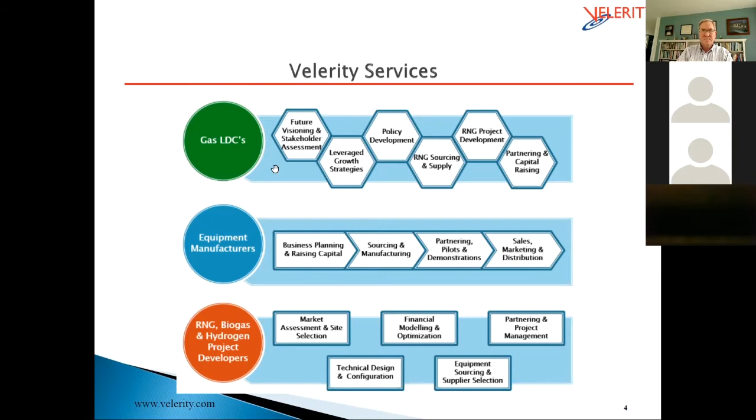So we've all heard of the colors of hydrogen. And there are some people - I've heard that nuclear power now has 2 different colors. One was gold that I heard recently, and the other was pink. I don't know which way the nuclear industry is going with their color choice, but let's put that aside for the moment and look at what all the hydrogen pathways are.

This is a fundamental element of moving to a hydrogen economy as was envisioned in the 1960s - hydrogen represents, I think, 76% of all the material in the universe.

It's a ubiquitous element, and there are many ways to get access to hydrogen. There is a company in Canada that claims to want to mine hydrogen from the earth, but for the most part, hydrogen does not occur naturally—you have to separate it from something else.

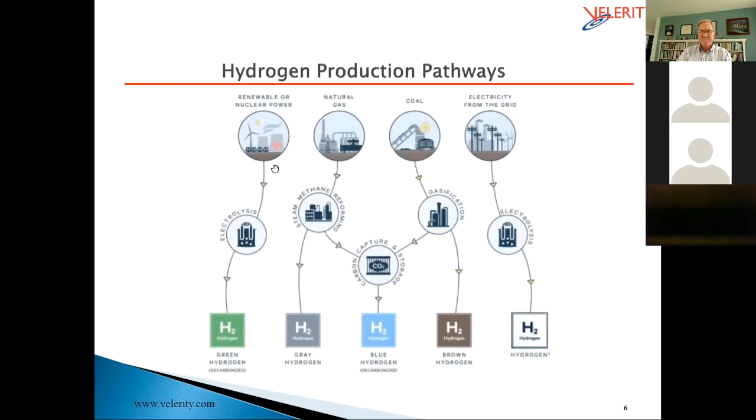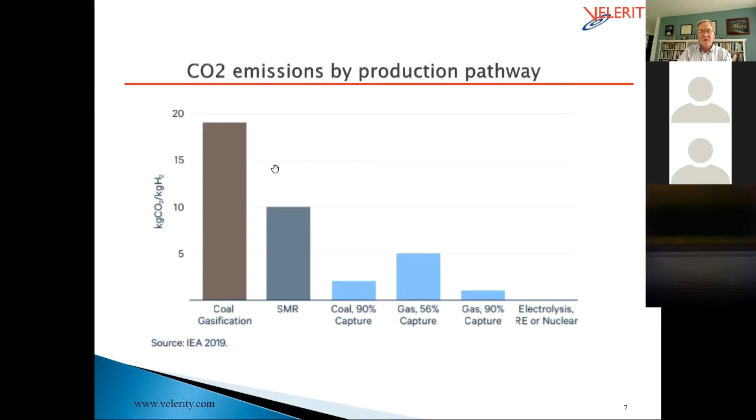In California, for example, when you run one of the 10,000 hydrogen cars that are currently operating, the hydrogen actually comes from natural gas. Potentially you could use electrolysis, but it actually is SMR hydrogen, at about 10 kilograms of CO2 per kilogram of hydrogen, and they buy offsets from the biofuel industry to green up the hydrogen. That's the strategy in California.

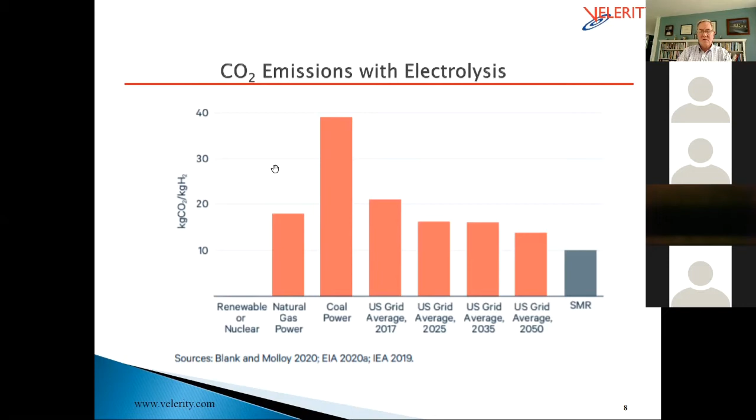Here in the Northeast, I understand the strategy is to buy liquid hydrogen for transportation, sourced from Hydro-Quebec generated hydrogen through electrolysis and hydropower, which is fairly clean. I also understand that might be a mix, not 100% green hydrogen, depending on the source of electricity, but it all bears closer scrutiny so that any claims made are accurate in their representation.

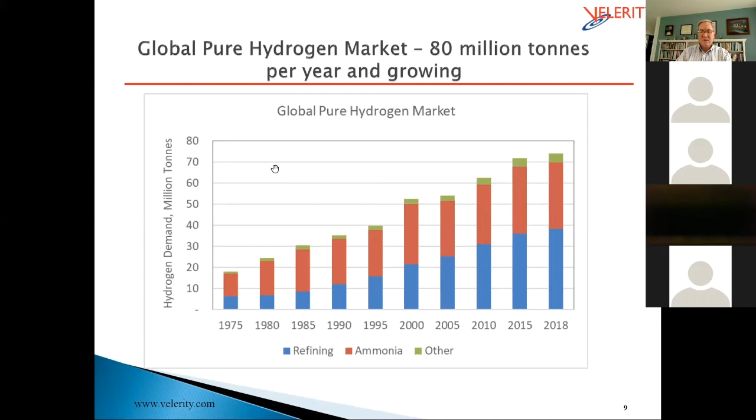It has doubled in the last 30 years, it appears - quite a bit of growth. So the question is, will this industrial use of hydrogen continue? If we reach peak oil, I assume we'll see refining intensity of hydrogen use level out, if not decline. And the greening up of ammonia is being very aggressively pursued around the world. So we'll begin to see the use of gray hydrogen presumably go down, not just because we're cleaning it up, but also because the root demand might be shifting.

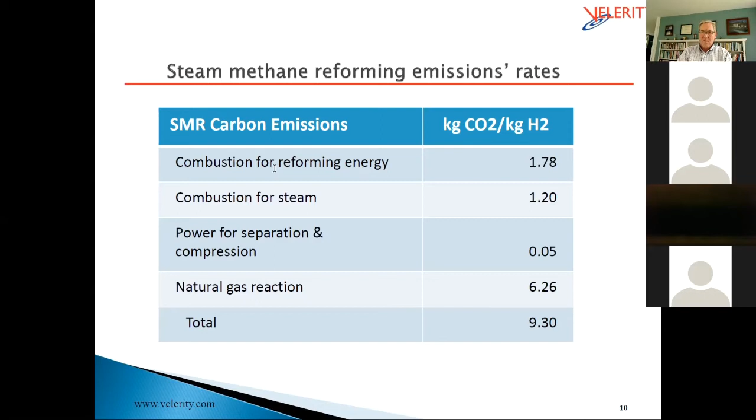If we're to achieve the carbon objectives, it's like climbing up a mountain one day, and then the next day you have to climb down the mountain. That indeed is what some would hope this chart would look like - that it would hit a peak and begin to go the other way.

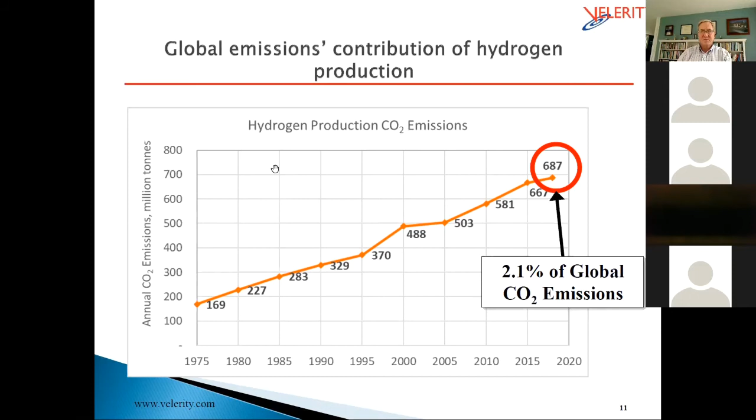The current carbon pricing is around $50 a ton, so there's quite a distance to go between $1,100 and $50. Direct air capture may be good in theory, and maybe we have to begin developing technologies that get us to 20 years from now, but it really is not a near-term approach. In fact, one of the early industry leaders in understanding carbon capture technologies was asked, this is kind of hilarious, if they would invest in a direct air capture company, of which there are several, and clearly demurred on that opportunity.

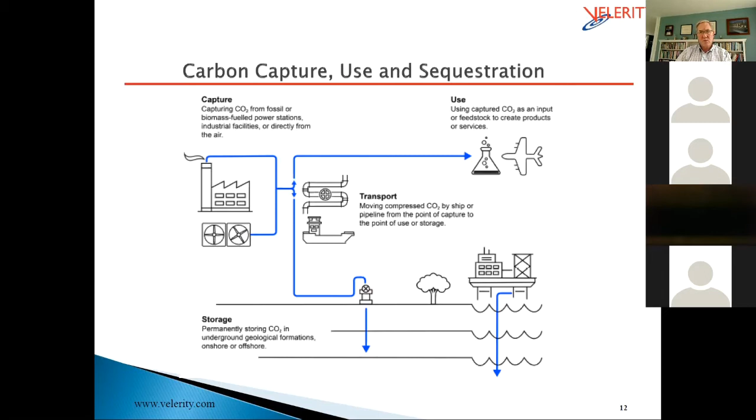Now, what is the process for this thing we call capture? The way it's done is you take CO2 and find a scavenger material that will absorb the CO2, then you change the conditions, temperature and pressure, to regenerate the absorbent material and eject the CO2. So it's absorbed from a mixed gas and then regenerated in a non-mixed gas situation, a higher concentration of CO2.

We really don't need to go over all the details of this particular chart, but it's fairly straightforward. The main column on the left is called the absorber, and the main column on the right is called the regenerator. Amines are used in a circular fashion to absorb the CO2. Off the absorber, there's a sweet gas escape, and on the regenerator is where the CO2 rich gas is ejected.

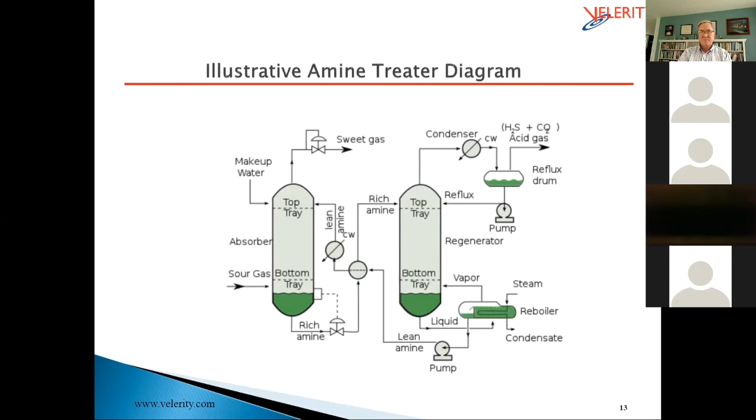The amines are, there's a range of them, so it's not just one that's used. The major ones, as I understand it, are the MEAs and the MDEAs used in these processes. You can see that there are different levels used depending on what you're trying to achieve.

One thing we haven't addressed yet, which we touched on earlier with atmospheric direct air capture of carbon, is that there are different concentrations of carbon in different processes. SMR has one of the highest concentrations of carbon in its flue gases, which makes it a lot easier to separate the carbon. Coal, for example, I think is the worst - they only have about 15% CO2 in the flue gas.

So various processes have different levels of carbon, and you apply different carbon capture methodologies depending on what that slipstream is that you're trying to address. It's not a one-size-standard-fits-all kind of solution. There really is a diversity of gas mixes out there that need to be addressed.

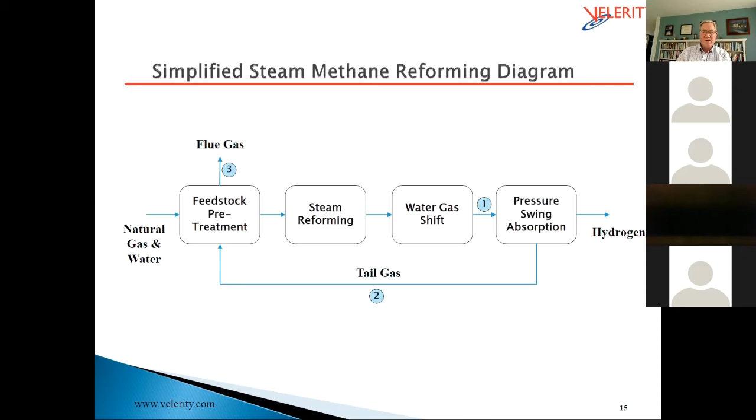The biggest one is 3 - that's the dominant one. You put your amine absorption system on the flue gas, and that's where you get your dominant reduction. But you can also do it in these other steps, which are contributory to reducing carbon dioxide, but don't do the lion's share. So, to be clear, there are different approaches that can be taken, each with different levels of carbon mitigation, as well as different economic considerations.

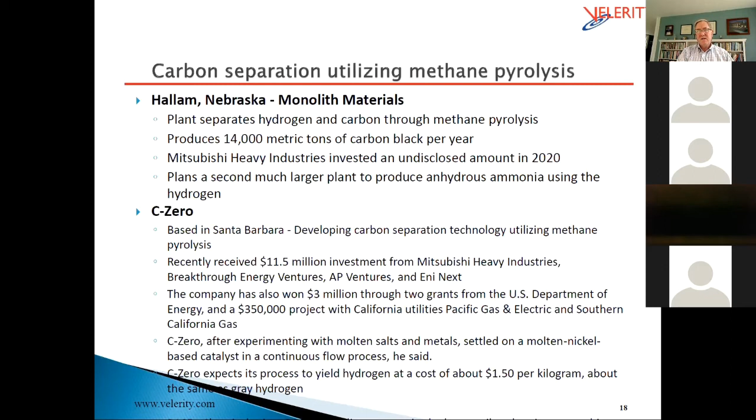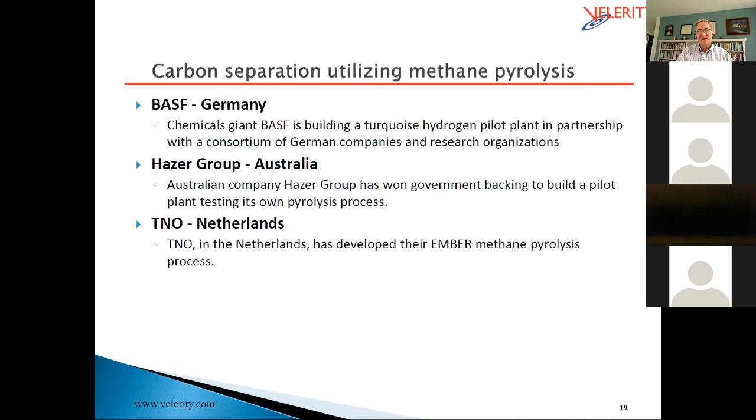These are some of the big companies around the world that are pursuing this technology. And I think we'll see a lot more of this type of solution develop going forward.

This is just to show Monolith Materials has actually built a facility and they've been operating it for 5 years. It's designed to produce carbon black. They didn't design it to make hydrogen, and they're building a complementary plant next door to produce ammonia now that they have all this hydrogen. So they're not trying to feed the hydrogen into any kind of energy production or hydrogen market. They're now figuring out they're going to put in an ammonia plant to use the excess hydrogen from the process that was designed to produce carbon black.

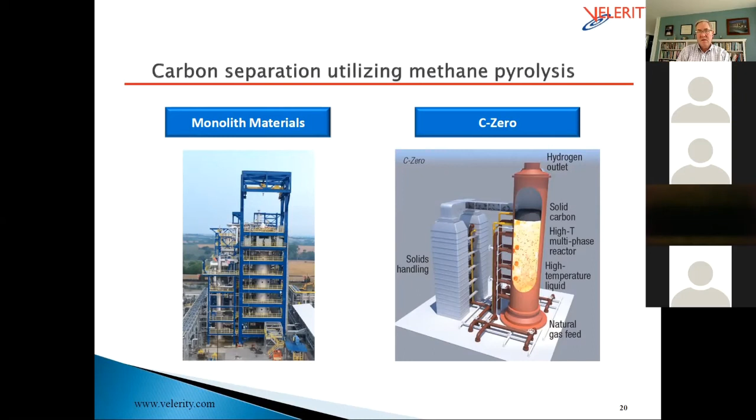And then C-Zero, same thing, fairly sizable process to precipitate out the solid carbon with the pyrolytic process involved as well.

So the remainder of this presentation, I'm just going to zoom through because I can see we should be opening to questions soon. These presentation materials are going to be available for you after the presentation—we'll post them on the Hydrogen Energy Center site for you. So I am going to take the opportunity to rush through a few of these, but just to show that the industry has really moved ahead in terms of addressing some of these issues.

This was a facility that was built for enhanced oil recovery. It's in Texas, and it was put in operation, as you can see, in 2013. The CO2 was then used for enhanced oil recovery. So that was the purpose in doing the carbon separation here, not to reduce carbon emissions.

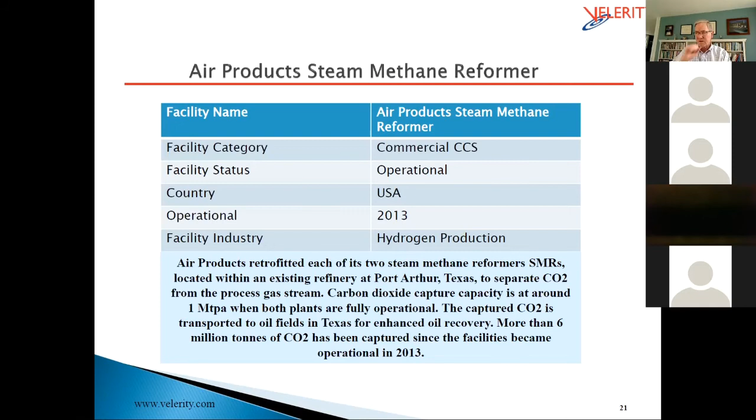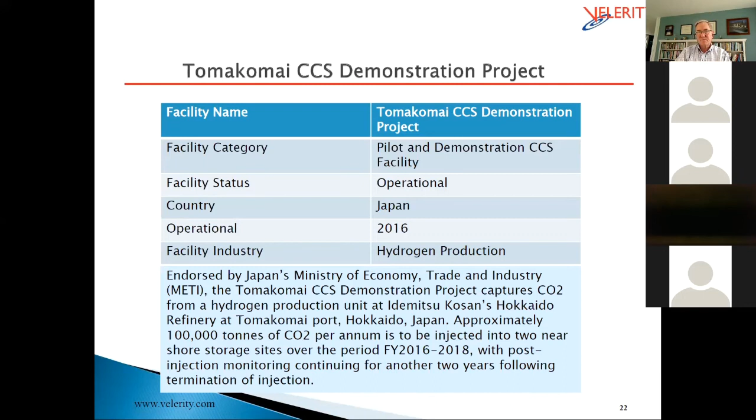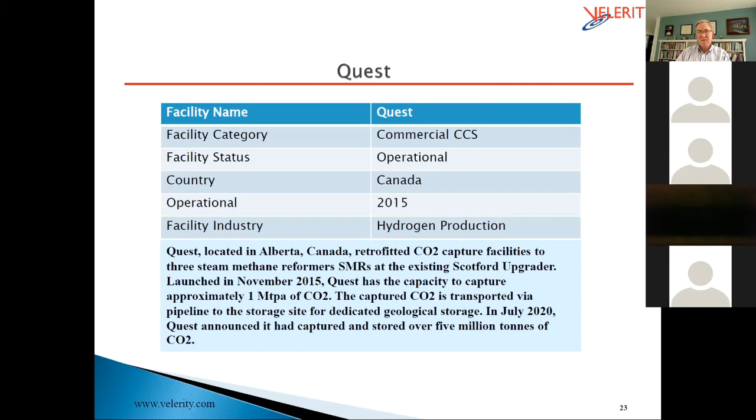I've spoken about this project earlier because this is a large SMR as part of the petroleum industry in Canada that takes tar sands and produces oil products. In the production of oil products, as we've mentioned, you need to take sulfur out and do other things, and hydrogen is used for that. So they have several, I think 3 very large steam methane reformers. They've also just started stripping off some of that hydrogen to be used for injecting into a natural gas pipeline. But the key here is that they're taking that CO2 and pumping it into a depleted well, and they are making every effort to decarbonize as much as possible to enable the continuation of their petroleum business. It's kind of interesting—I think they've invested over $1 billion in this facility.

This is certainly another project in the United Kingdom, and again, it has to do with sort of the classic case of injection. I want to get to some of the other projects here, and then we can open up for questions.

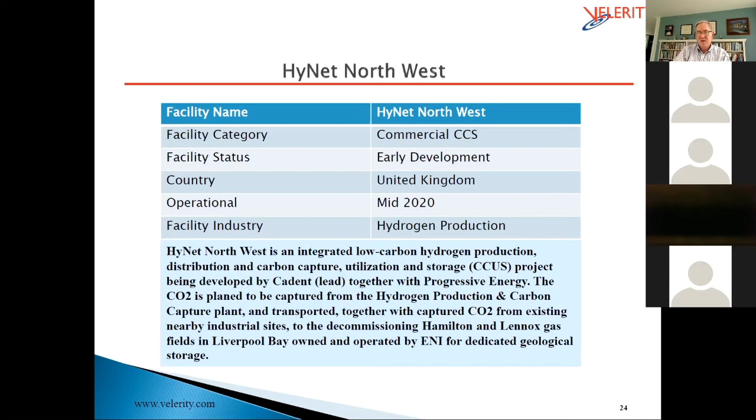This is a supply chain from Australia. Australia, similar to Canada, has a very strong interest in maintaining—they are one of the largest exporters of coal in the world, and they also export natural gas, and they want to keep that business going. So there's a strong effort to decarbonize it as much as possible. But they're looking at using coal to produce hydrogen and then to ship that hydrogen to Japan, and to complement that project with carbon capture and sequestration as well.

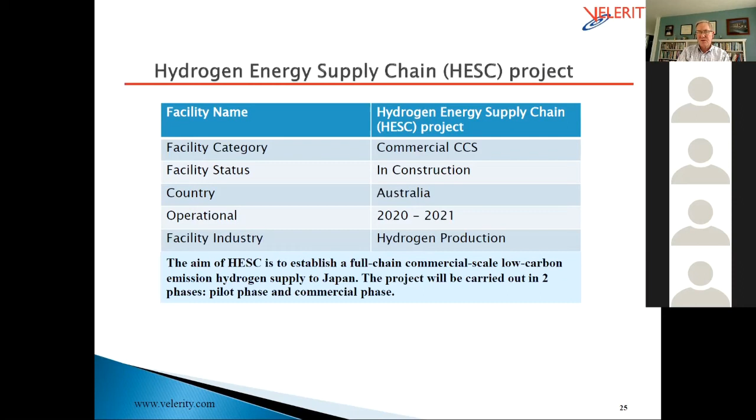Now, I did just want to mention this one, and we're going to see a lot more of this going forward, and then I think we'll open for questions. The concept of carbon negative is a process where you use biomass to produce energy, but then you capture the carbon that's emitted from the biomass combustion, and you sequester that carbon. This is one of those potential systems because it's seen that if you're using a regenerative biomass resource like trees, those trees will be regenerated and capture carbon going forward. People are concerned about biomass because you may be emitting a lot of carbon today, but then capturing it over decades. So there's a mismatch of the timing issue with carbon sources and sinks.

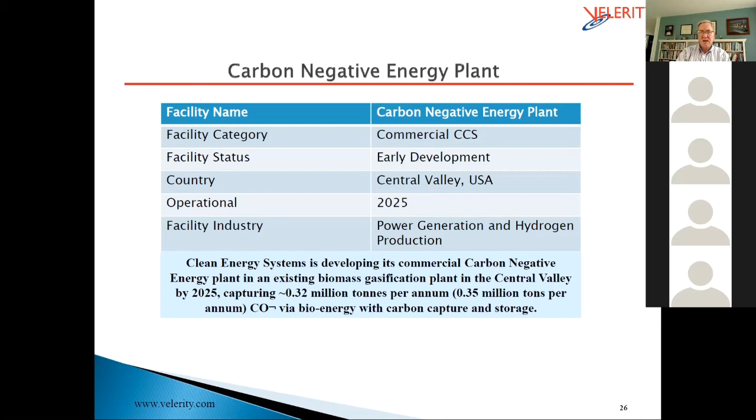The point is that if you capture the carbon on a regenerative biomass resource, and the regenerative element of the biomass continues to absorb carbon, your net effect on the carbon model is negative.

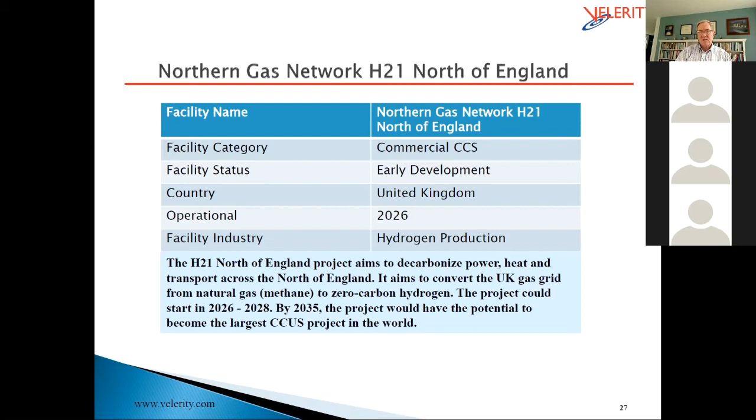So we are seeing more of that, that if you capture carbon off a biomass resource, it can be claimed as a negative carbon facility, which is very interesting. This is one of the major projects for using hydrogen in pipelines, generating that hydrogen from both electrolysis and steam methane reformation, and then injecting the carbon dioxide into offshore depleted oil wells.

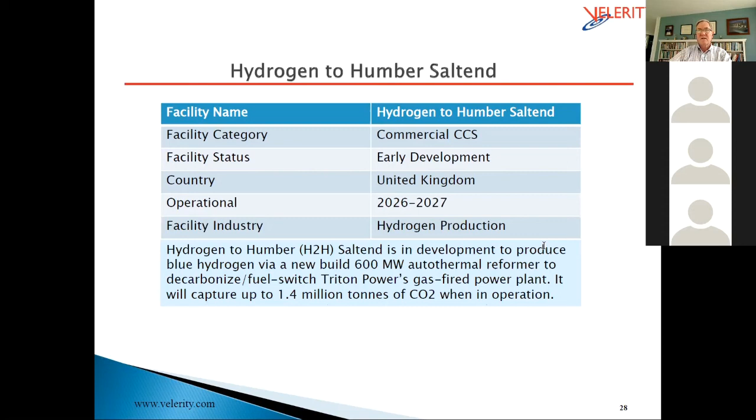Well Brad, I'm going to start with a question that's on pyrolysis. Someone's asked whether the process is endothermic, and someone else has said that thermodynamically it's more favorable than water splitting. Do you have any comments on the amount of heat it takes to do this process and where that heat comes from?

Yeah, I mean that's the key. When you saw the carbon capture numbers, if you want to do 90% carbon capture with amines on natural gas steam methane reformation, we're talking about a 15% increase in cost, and that's really due to a 50% increase in energy. It just uses a lot of energy, and that's really what all these processes tie back to. It bears looking into, because the field is so new.

But the temperatures are very high, I think upwards of 1800 to 1900 degrees C. It's endothermic, if I have the terminology correct, it takes energy to do that process. The process of gasification using pyrolysis is a one-step high temperature thermal process with a big energy input, and that's the key to the process. You can then separate the gases and use the waste stream as a form of heat as well. So that helps, but it is endothermic, it takes energy.